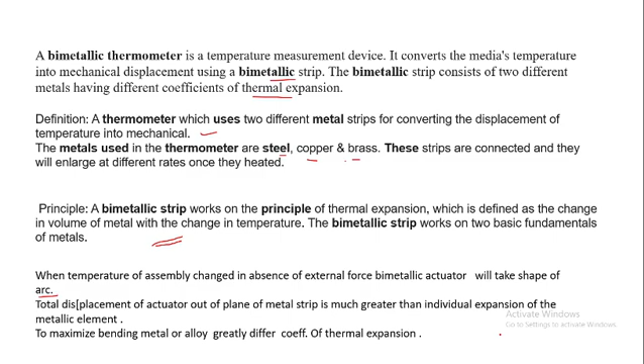So the metal with the larger coefficient is known as the active element, and the one with the smaller coefficient is known as the passive element. The active element has a large reaction, while the passive element has a small reaction. For maximum actuation, we can use iron and nickel alloy. In addition to maximizing the actuation, other constraints such as electrical and thermal conductivity can be considered.

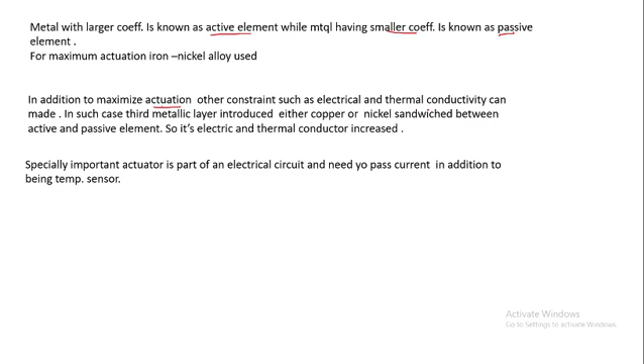In addition to maximizing the actuation - actuation meaning the change and bending increases - you can use other constraints such as electrical and thermal conductivity. For this, we can use a third metallic layer, introduced as either copper or nickel, which is sandwiched between the two active and passive elements, so that electrical and thermal conductivity is increased.

So it's especially important when the actuator is part of an electrical circuit and needs to pass current in addition to being temperature sensitive. So you can consider a bimetallic strip: suppose there is one metal strip, and this is another metal strip.

So when these two metal strips are bound together or held together and heating is applied, what happens? Since the thermal coefficient is different, we can use this property. The change in dimension is different because the thermal coefficient is different. So we can use this, and this is nothing but the thermal coefficient of expansion.

So if you consider the bimetallic strip, we get the arc shape due to the thermal coefficient being different. So this is about your bimetallic thermometer.

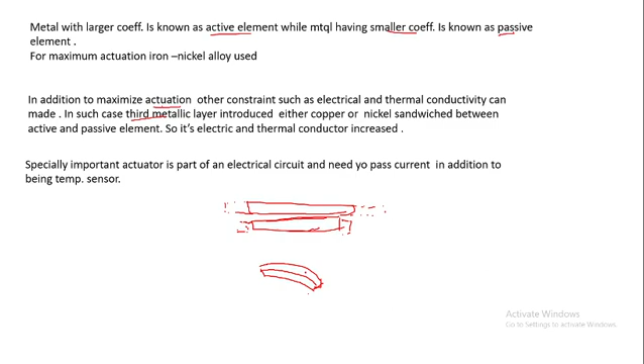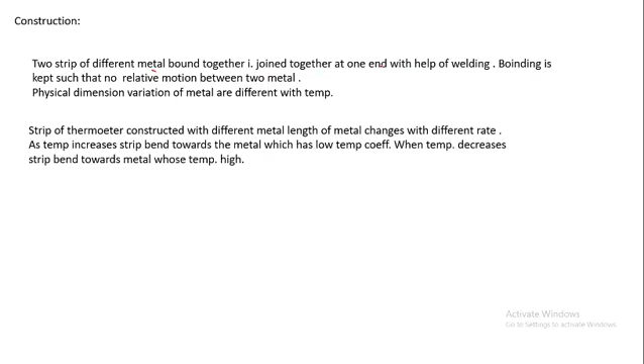Now what is the construction of the bimetallic thermometer? We can use two strips of different metal which have to be bonded together, joined by any procedure such as welding, so that bonding is kept such that there is no relative motion between the two metals.

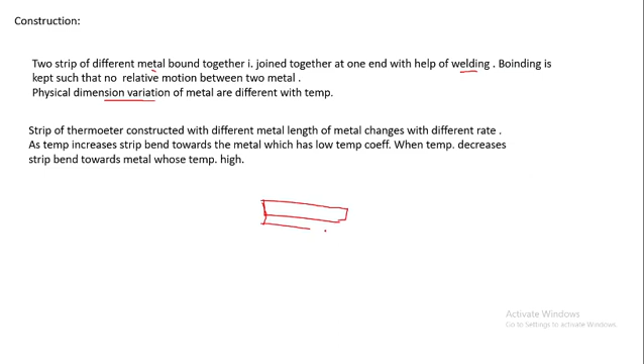As the temperature increases, the strip bends towards one of the metals. We should remember there are two ways this happens: as temperature increases, the strip bends towards the metal which has a low temperature coefficient.

Suppose there are metal 1 and metal 2, and the temperature increases. The strip bends towards the metal with the low temperature coefficient. Suppose metal 2 has the low temperature coefficient, then the bend is like this, towards metal 2.

Now if it is opposite, that is the temperature is decreasing, then the bending is exactly opposite. So these are the construction details, and we can use this principle.

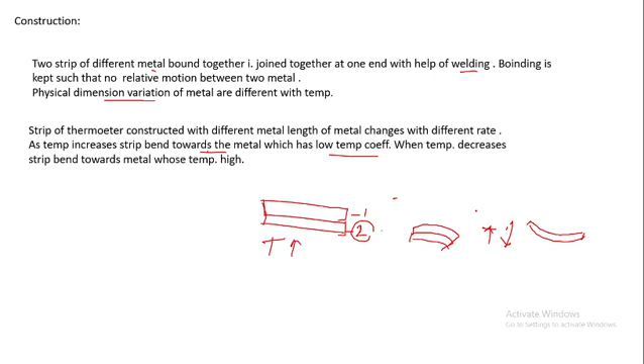Now consider the bimetallic strip in the form of a cantilever beam; the strip is fixed at one end and the other end is free. Suppose this is the bimetallic strip, and this is the cantilever. Then we can use the cantilever, so let's draw it.

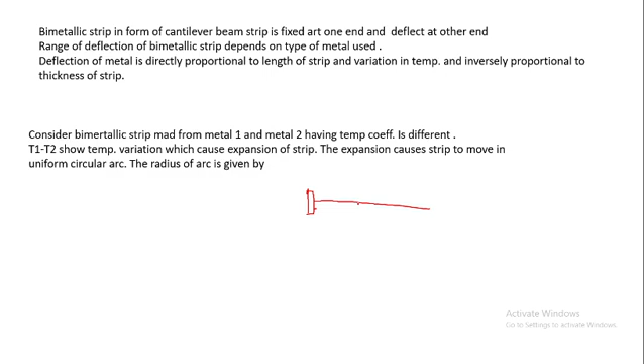So this is one strip, and there is another strip we have to connect. There are two strips, connected to a pointer, and here is a scale. It is fixed to a rigid support, and there is a free end.

Suppose T divided by 2 is the thickness of this, and T divided by 2 is the other, so the total thickness is T. Suppose there is bending due to the applied heat, like this. The bending of these two depends upon the thermal coefficient of expansion. As with cantilevers, we get a curvature: this is R, this is R plus T divided by 2, and this is the angle theta.

So here is a scale we use for determination of the deflection, that is the mechanical displacement.

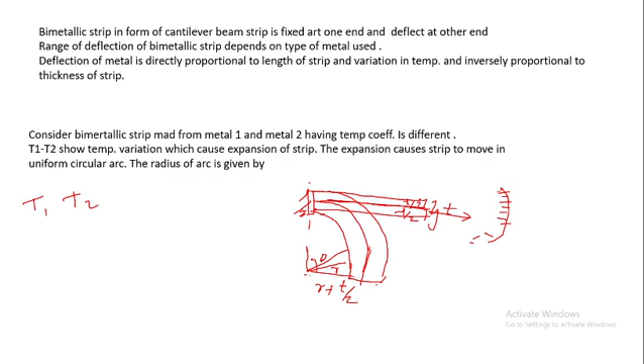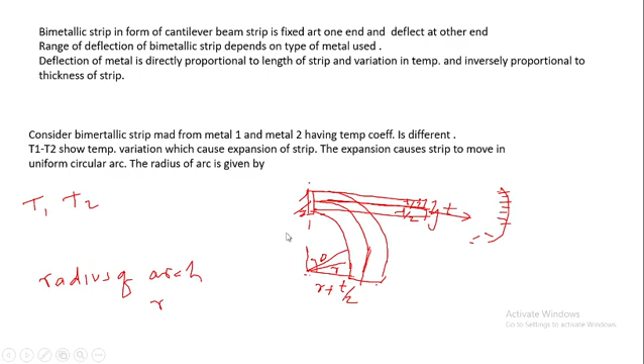Now expansion causes the strip to move. Expansion leads to the bending of the beam, forming an arc, and the radius of that arc can be defined.

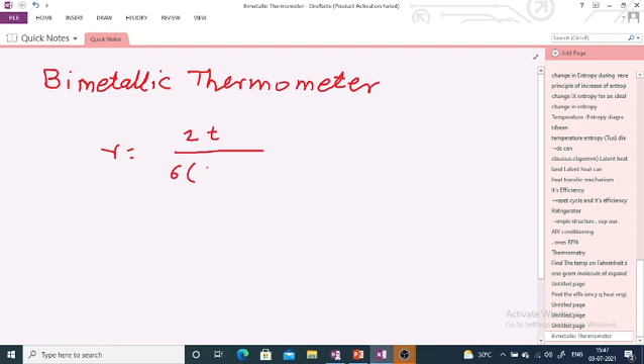There is one equation for the radius of the arc: R is equal to twice T divided by 6 into alpha 1 minus alpha 2, into T2 minus T1. Here T is the total thickness of the strip.

Alpha A and alpha B is the thermal expansion coefficient, for alpha 1 and alpha 2. This is for metal 1, that is strip 1, and this is for metal 2, that is strip 2. T1, T2 minus T1 is the change in temperature.

This expression can be used to determine which way the strip bends. The strip bends towards the low temperature coefficient side when temperature increases, and the inverse happens when temperature decreases. It will bend towards the greater temperature coefficient strip when temperature decreases.

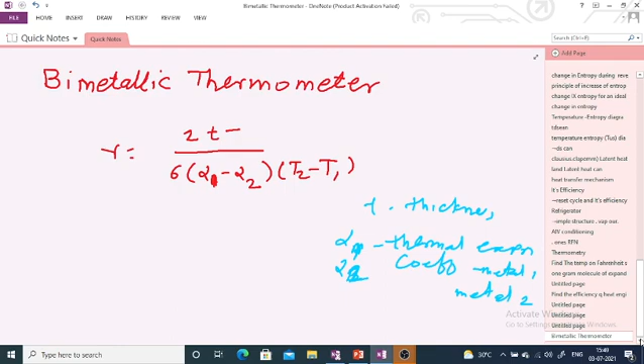Now for practical application, the strip is made up of metals. When selecting the strip practically, we usually follow this rule: the modulus of elasticity, that is the elastic constant, must be the same, and the thickness must also be the same.

Modulus of elasticity is the ability of a material to regain its original position or shape after removal of the force. So after removing the force, it comes back to its original state.

For further purposes, we consider a strip that is fixed at one end and free to move at the other end.

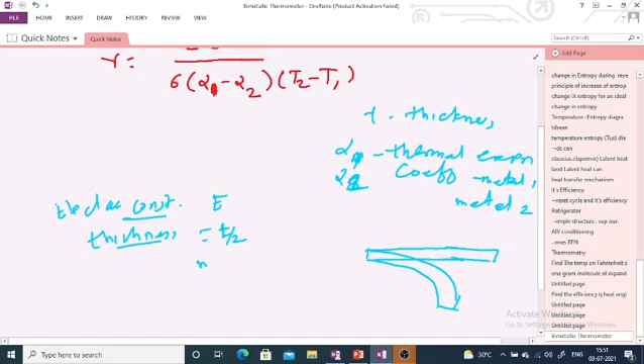So what happens when the temperature of the surrounding changes? The strip bends towards a circular arc. If the temperature increases, it bends towards the low temperature coefficient side. If the temperature decreases, it moves towards the larger temperature coefficient side.

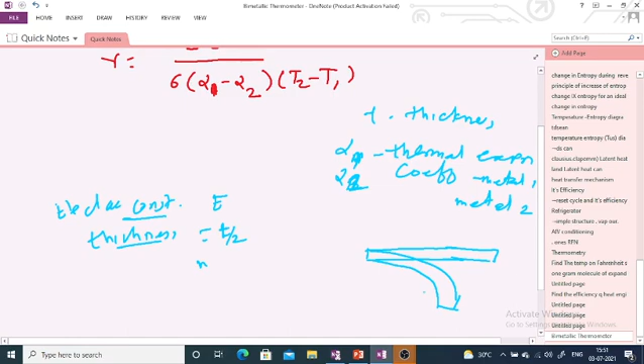Suppose the metal has thickness T, with T/2 on each side, then we get the equation: R plus T divided by 2, divided by R, is equal to the expanded length of strip 1 divided by the expanded length of strip 2.

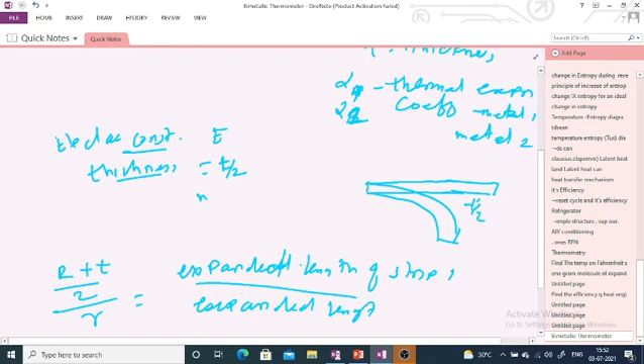Using this, the expanded lengths of the strips can be determined. Suppose L is the length of strip 1, then the expansion of that length is L times 1 plus alpha A times (T2 minus T1), divided by L times 1 plus alpha B times (T2 minus T1). These cancel with each other, so we get this result, and L cancels out.

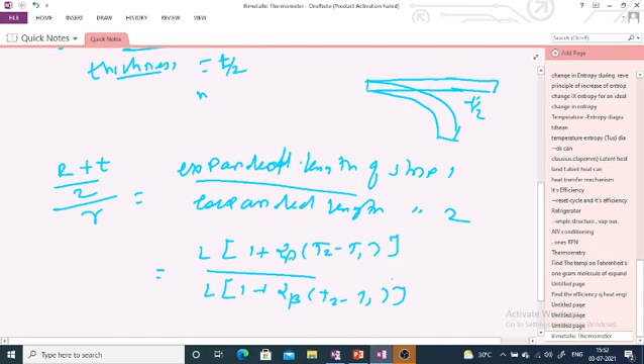Rearranging terms, the equation is written as R plus T times R divided by 2, where capital R is nothing but the radius of the arc, considered as the maximum arc. So it can be written as R equals T divided by 2 times 1 plus alpha.

Here we use the symbols 1 and 2, not A and B. So we get R equals T divided by 2, times (1 plus alpha 2 (T2 minus T1)) divided by (alpha 1 minus alpha 2)(T2 minus T1). This is the equation. If one of the metals has a very small temperature coefficient, then R equals T divided by 2 alpha A (T2 minus T1).

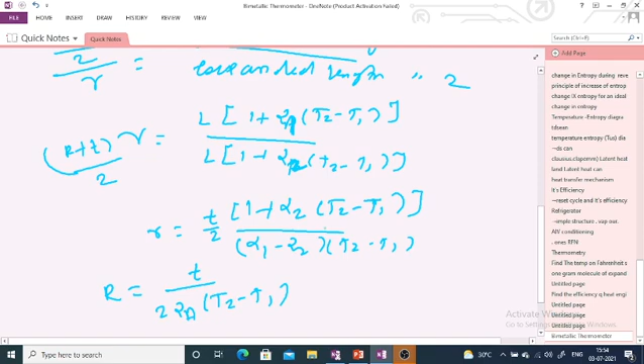This is an expression for when one end of the metal is fixed and the other end deflects freely due to variation in temperature.

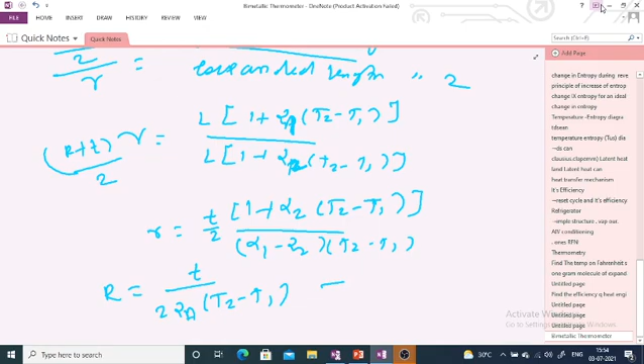Now we consider the application of the bimetallic thermometer, along with its advantages and disadvantages.

Advantages: it is simple to use and its cost is very low. It is a portable device, so it can be carried from one place to another. Checking for physical damage is easy. A power source is not required for the measurement device. It has good repeatability and calibration does not drift. It should be remembered that this is simple, robust, and inexpensive, but accuracy must be within plus or minus limits.

Accuracy must be plus minus 2 to 5% of the scale. This is your accuracy. They can be used whenever the mercury thermometer is used.

The disadvantage is it cannot be used for automatic recording of the temperature. There is a time lag in measurement, a delay of time. The temperature does not change quickly.

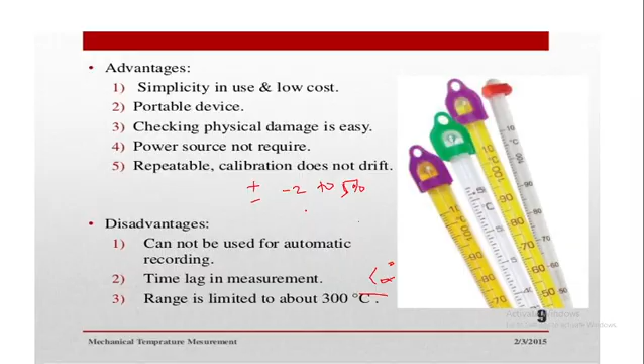Next is the application of the bimetallic thermometer. It is used as a control device.

It is used in household devices like the oven and air conditioner.

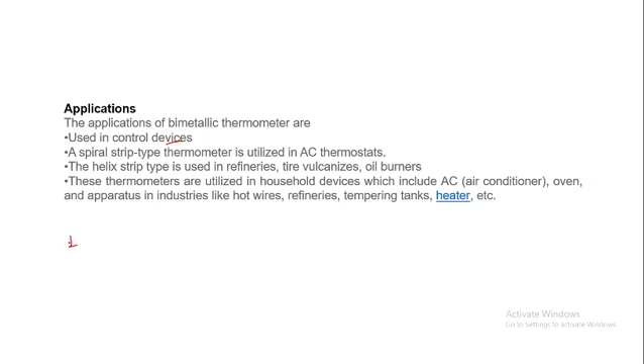Now we will consider its use in industrial application. There is one more application, that is industrial. You can use the industrial application.

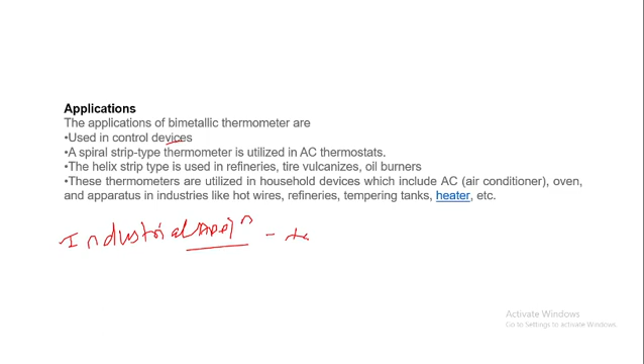Mechanical thermostat finds wide range of application in temperature control. It is used for temperature control in industrial processes.

In an industrial process, it can be used as a temperature controller.

There is widespread use of the thermostat with the discovery of INVAR. INVAR is nothing but a type of metal strip used, made of iron and nickel. It is used for the measurement of temperature.

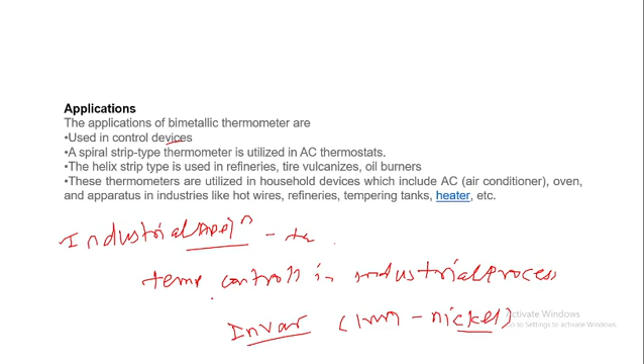One more configuration is spiral and helical coil, used in the bimetallic thermometer. The strips used in construction are of two types: one is spiral and another is helical. This is a spiral.

It is used for industrial or commercial measurement, either spiral or helical. The thermal deflection is linear within the given operating range. The spiral strip bimetallic thermometer is used to measure ambient temperature and absolute temperature. This is your spiral strip metallic thermometer.

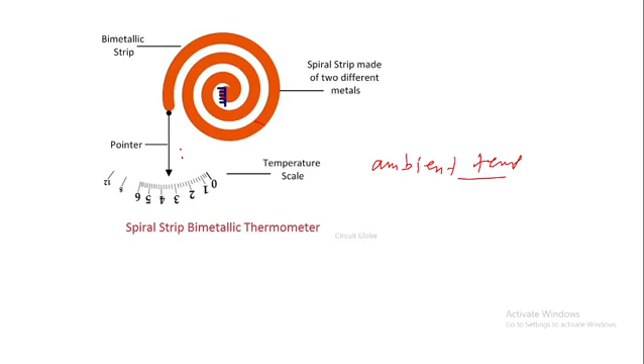This uses the thermal expansion property of the metal, used as a spring with variation in temperature. This is your bimetallic spring attached. As you increase the temperature, there is expansion of the dimension. Due to the expansion, it changes the direction of the pointer, giving mechanical displacement. It is useful in industrial processes such as refinery and oil burner.

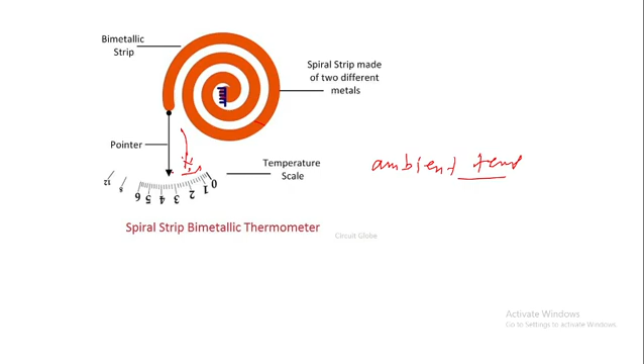Another type is the helical strip thermometer, used for the same purpose in industry. This is helical, like the spiral spring. This is a helical strip thermometer.

So this is about the bimetallic thermometer, continuing from the last chapter, and this is the last article. I hope you will understand everything I taught you. If you have any problem, you should call me anytime. So thank you.